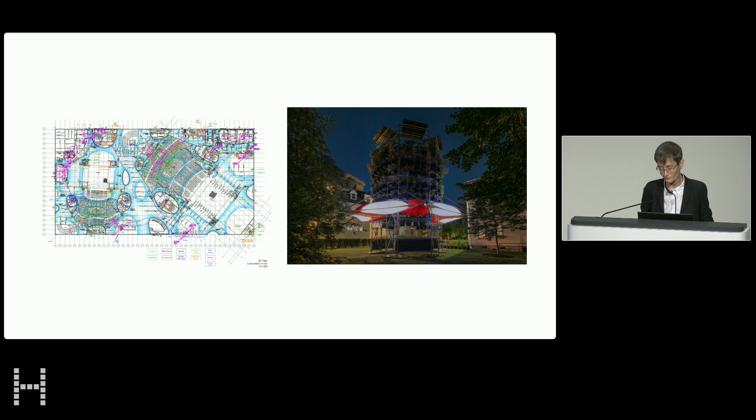John Andrews' building, Gund Hall, our school's heart, was designed to embody the school's collaborative ethos, unifying 3 departments into one single school under one symbolic roof. Our school's students, faculty, and staff come from every corner of the world and with all sorts of varying experiences and expertise. It's our vast multiplicity of perspectives that fuels our classes, our conversations, our research, and our projects.

In my email to you all, I turned to Anthony Appiah's book, Cosmopolitanism, which I was surprised to realize is almost 2 decades old at this point, but it seems ever timelier every time I read it, given the complexity of our current world. In it, Appiah urges his readers to learn about people in other places, take an interest in their civilizations, their arguments, their errors, their achievements, not because this will bring us to agreement, but because it will help us get used to one another. And I think that's a really great way of understanding how we all operate in this big, messy school. A spirit of cosmopolitanism, in short, is fueled by a genuine and generous interest in and conversation with others.

So today's event is a chance to learn about the work of others, our 8 new ladder faculty, as a means of catalyzing conversation with them and with others, afterwards at the reception that follows and for the rest of the year. I've asked Rachel, Magda, Maurice, Iman, Elisa, Angela, Kaja, and Karen Lee to very briefly present how they see their work as being relevant to the school and/or to the moment. Now, I want to be clear, they are not presenting full-on lectures. They each have a mere 12 minutes to present essentially one point that is intended to seed conversation with you all.

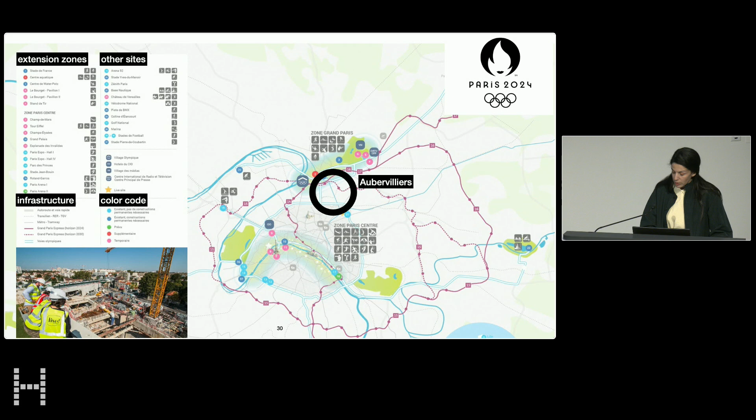This transit expansion was planned in concert with the sites for the 2024 Olympics, which are set in the northeastern part of the metro region. In 2023, actually, the GSD awarded the green prize to the Grand Paris Express. Together, the two initiatives, Olympics and GPE, have turned suburbs like Aubervilliers into sites of unprecedented real estate development and speculation.

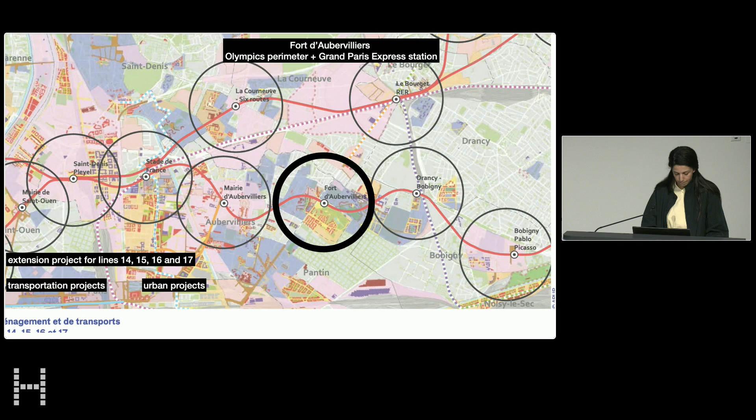40% of Aubervilliers' residents are foreign-born, and fully half live under the poverty line, making it the second poorest city in the capital region. Historically, it's always been a polluted suburb, the dumping ground where Paris dumped its industrial waste, and with the rise of cars, it became known as the city's go-to open-air garage.

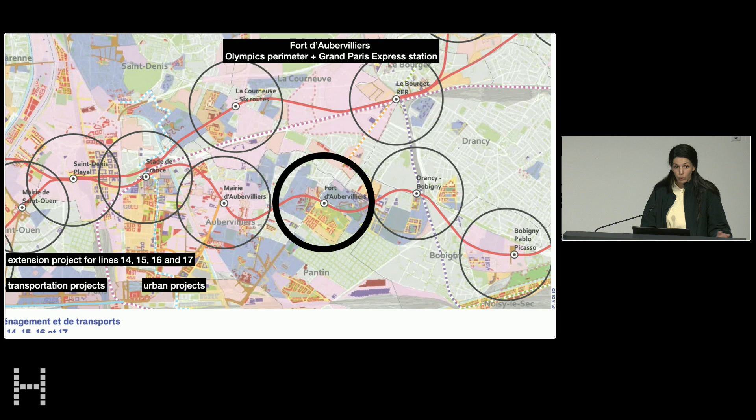But because it is just over the highway from Paris, it's also beginning to gentrify and attract interest from market rate developers.

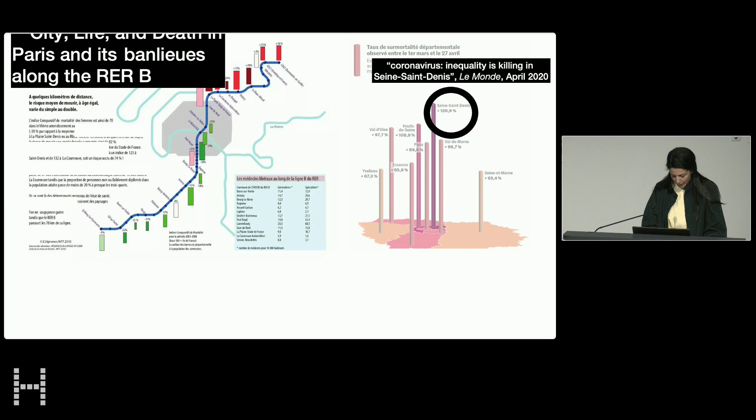In 2014, in line with the extension of the Grand Paris Express, developers proposed plans to transform the city's obsolete military site into a gigantic eco-district. It was proposed as a 36-acre project that would equip the neighborhood with 1,800 new units, 25% set aside for lowest income households, and a new state-of-the-art Olympics aquatic center.

You might ask, how did this affordable, healthy housing project come to be on a parcel so valuable for market rate development in a gentrifying inner ring suburb like Aubervilliers?

That might be a David and Goliath planning story. Aubervilliers is what we refer to as a red suburb, a historically communist stronghold. So it's not a surprise that the local communist housing coalition, defeated now but in place at the time, led by then Mayor Mériem Derkaoui, a real maire bâtisseur or builder mayor, followed 3 steps to negotiate this deal. She first filed a complaint, as one does, then she froze building permits, then she topped it all with a formalized public-private partnership. Beyond the Olympics myth, progressive new public management with a French twist.

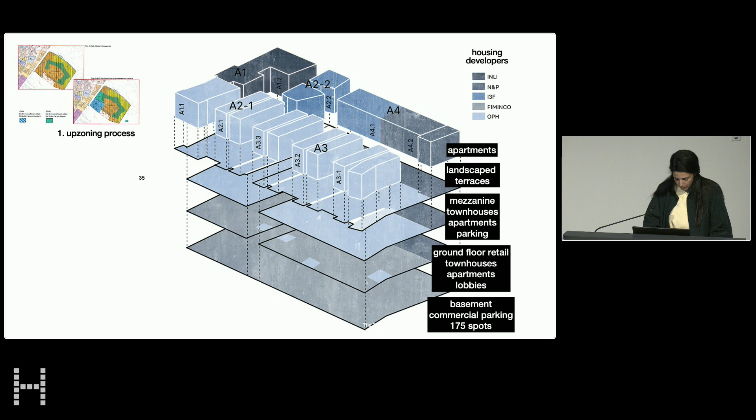This gave way to a fast-tracked upzoning procedure for the entire Fort parcel, which allowed developers to build at maximum capacity. Second, the coalition had a say in every aspect of the eco-district healthy housing design, including that the site's beloved 90-year-old community garden, which had occupied 5% of the land, be preserved, if in some cases relocated.

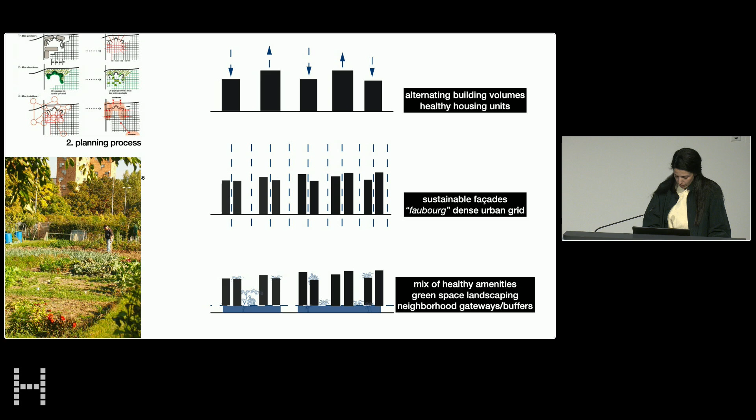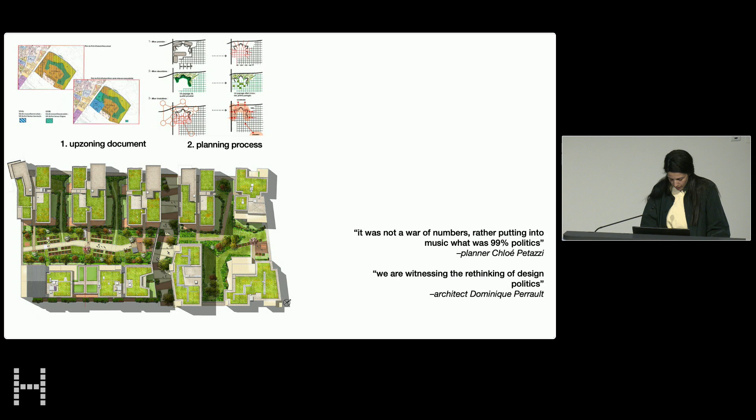The direct impact this coalition had on a series of zoning codes, charts, and plans associated with the Olympics perimeter illustrates the micropolitics of planning and a one-of-a-kind rethinking of design politics.

Looking at this case shows that it's possible to have both hard-won, significant community benefits, such as pool access, community gardens, state-of-the-art sustainable architecture, and a very, very proactive and aggressive pro-housing approach.

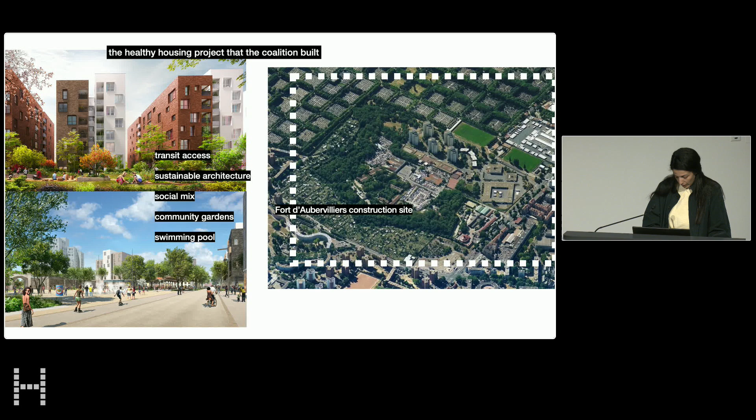This story is not particular to the suburb of Aubervilliers. It shows that in Paris and elsewhere too, there's no irreconcilable conflict between community involvement, developer concessions, upzoning, growth, and healthy planning goals. It's what characterizes the Paris housing model, more so than the frail 15-minute city concept, a mythology I certainly don't believe in, but we won't get into that today.

This lesson was top of mind when I worked at the Paris planning agency, APUR, where I was in charge of identifying and disseminating healthy planning initiatives.

Compared to the other built-up older American cities like New York or Boston, Paris was building more housing faster. But healthy approaches were always thought of and still thought of as on the margins of the planning field, and not at the center.

And that's something that Mayor Hidalgo, Anne Hidalgo, that you see here on the slide, was ready to change. She made our work around health central to her political agenda and her planning agenda. And to make us attuned to the important work that still needed to be done, particularly in the field of environmental health, she moved our agency from a building that looked like this to an old warehouse overlooking the highway and the city's waste collection center. All it took to move us away from myths into relevance.

Some projects we worked on were very small in size, from the school street to the hospital courtyard, or the scale of one housing unit. Others were large-scale health impact assessments, community programs, and health disparity studies.

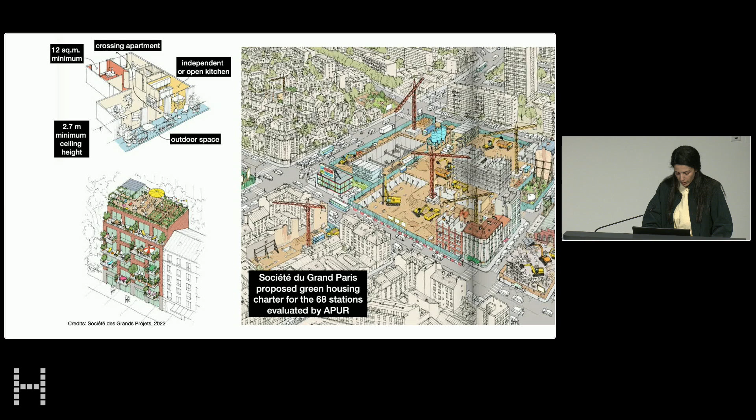My team evaluated, for instance, the Grand Paris Express developers' proposed green housing charter, which orients new housing across all 68 stations of the new Metro line, for large perimeters, infill housing, or smaller parcels. Such design elements as ceiling height, cross-ventilation, and so on for 8,000 future units, evaluated through the lens of thermal comfort to mitigate urban heat islands.

While my work was never simply celebrating the impacts of large development projects, I also wanted to question the pure criticism around the Olympics, or the Grand Paris Express for that matter. For instance, I co-authored a Lincoln Institute grant project showing that housing supply was steadily increasing in the redeveloped perimeters, but that compared to similar hot markets like New York, there was no ground for hyper-gentrification-induced displacement claims or an actual spike in rents and sales prices.

I continued carrying this type of work at the Joint Center for Housing Studies and will also do so through a French-American Albertine Foundation grant.

We adopted dozens of findings about small to mid-sized health initiatives into the new zoning regulations of the city's pioneering PLU bioclimatique, a strategic land use plan that will orient what gets built or rehabbed for the next 20 years, pioneering a way of planning the city with health and climate change at the forefront.

I hope to continue exploring this, for instance, at the GSD's Healthy Places Design Lab, led by Ann Forsyth and Jennifer Molinsky.

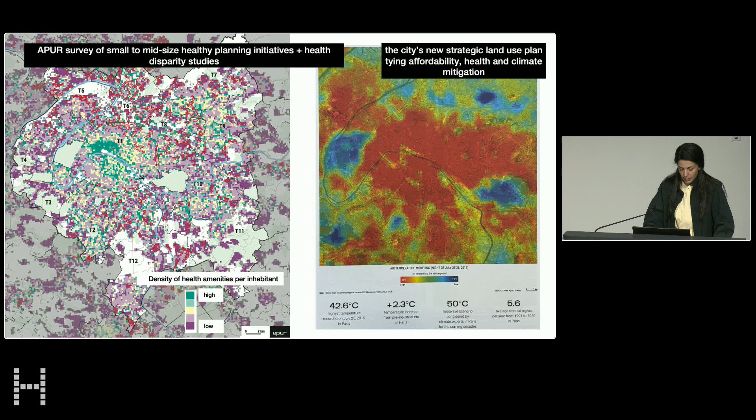In addition to developing data analysis that made it into zoning codes, a priority is to publish research for larger audiences. In 2022, I collaborated on the French issue of Architectural Review, where I critically discussed healthy planning work led by Mayor Hidalgo's administration, as well as other planners and architects working in the city. This piece was among the magazine's most read stories of that year.

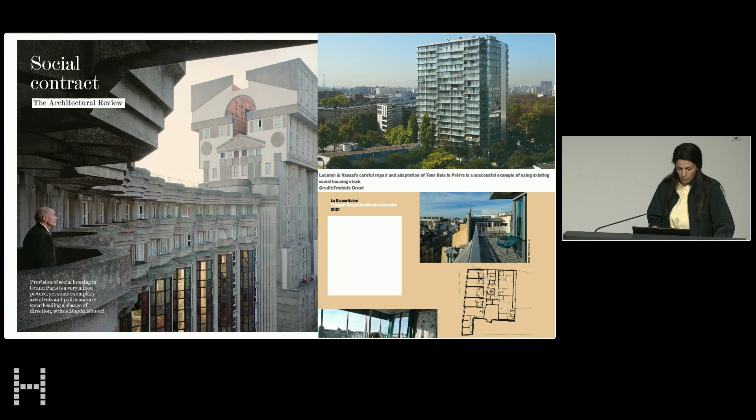I also wrote about this in two upcoming collective books. It's in French, who cares, you might say. One of them, Nos lieux communs, out this Wednesday, will be translated to English in a few months. And my take in the second one, out next month, will be distilled in upcoming peer-reviewed publications in English.

My first experience at Harvard goes back to 2018, when I co-taught a summer school on healthy urbanism with the extraordinaire late Rob Blue, whose mentorship lives on. Last year, I got to work with fantastic students when I co-taught Core Studio with terrific colleagues here, which I coordinate this year as well.

I'll also talk about all this in a fall project-based course, Do No Harm, Dilemmas in Planning for Health, with the Paris-based client Roofscapes. First class is tomorrow at 9 a.m. in Gund 318.

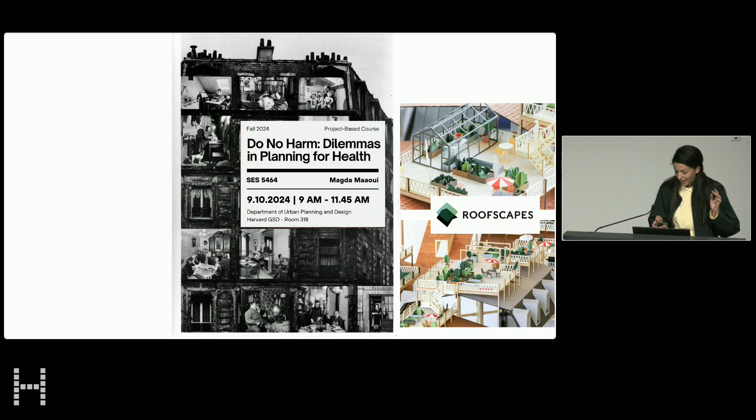And in the spring, I'll teach at home and abroad, housing in comparative perspective, in partnership with the New York-based Urban Design Forum. Thanks for listening, and I'm leaving with music on, which is perfect.

Can we just keep the music on, please?

Hey GSD, it's wonderful to be here, to be back after some 20 years from my Loeb Fellowship and teaching my first option studio on Detroit, where I later went on to live and work.

So a little bit about my journey here and the roots of my design advocacy. I grew up in Brooklyn. My parents, immigrants from the Bahamas, would raise 9 children here. I was the youngest.

During the 20-plus years that we owned our home, I watched a socially and economically vibrant community fall into disrepair and disinvestment. I remember very distinctly when the bulldozers arrived. My house was at the fault line of urban renewal. Fortunately, our little block remained intact, and but for the fact that families owned their homes, my block would have been completely demolished.

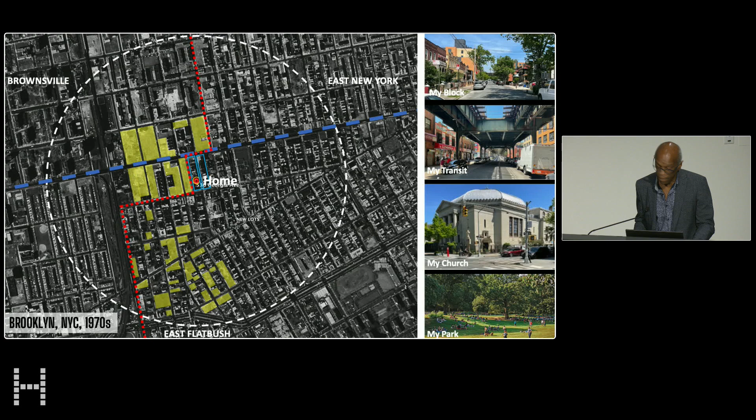I would later come to understand that the decline of my neighborhood was mirrored in hundreds and hundreds of communities just like mine, and this was the result of intentional race-based public policies like urban renewal, federal highway construction, redlining, and many others that segregated communities and starved them of the resources they needed to thrive.

So when I arrived in Detroit in 2015, I found an incredibly resilient community of hundreds of thousands of individuals who simply refused to leave and give up on their city. My job as the planning director was to understand why they stayed, to see them as citizens worthy of being surrounded by beauty. In fact, I have come to believe that it's ultimately about people and that everyone has a right to live in a socially, environmentally, and economically beautifully designed community.

I discovered that the soul of a city, any city, resides in its neighborhoods. You can't transform a city for all if you lose its soul. I've worked to transform the places where people actually live out their daily lives.

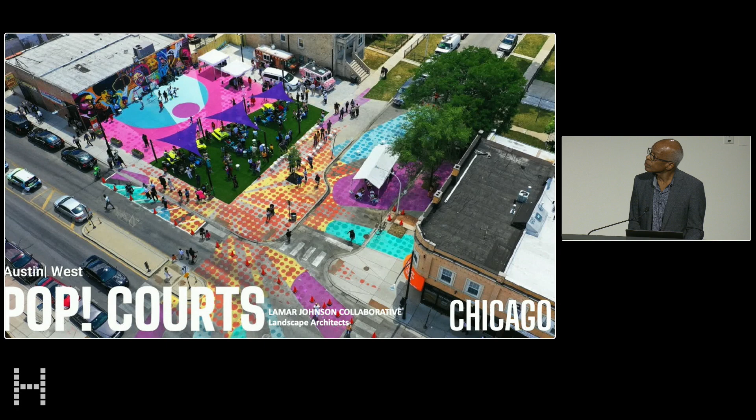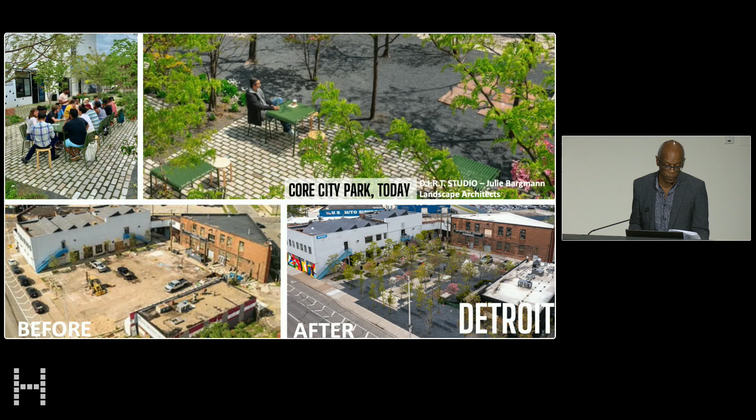It's also about parks nestled in existing neighborhood fabrics that have the power to instantly solidify a sense of place and generate reinvestment along its edges. It's about greenways that repurpose abandoned infrastructure of cities and other forms of mobility that act as the connective tissue between neighborhoods.

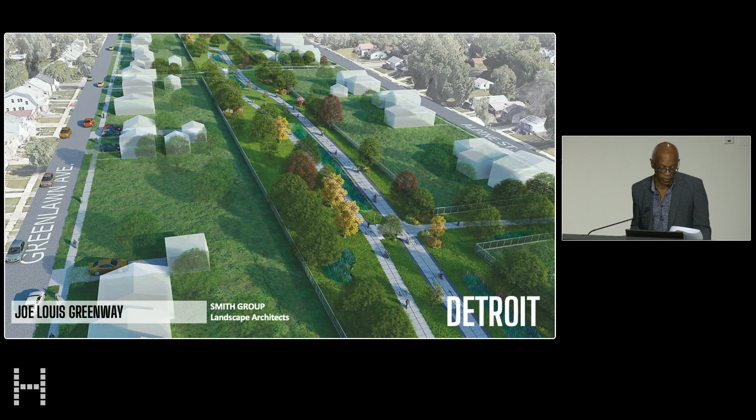This 2-mile pilot gave the city of Detroit the confidence to take on one of the most ambitious greenway systems, 27 miles long, a linear park connecting 25 different neighborhoods and crossing 3 cities, connecting them all to the Detroit River and to each other. This $250 million park system for pedestrians and bicycle mobility is being built in phases, first in neighborhoods that have historically had the lowest rate of car ownership and the lowest level of public investment in amenities of this type.

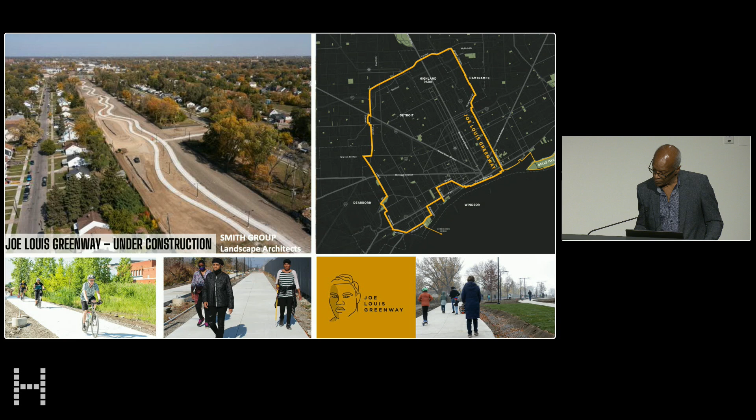It's about telling history through buildings that have witnessed it and survived to remind us of collective memories, finding ways to add new layers of history and contemporary stories to be told through addition. With so many vacant buildings available in Detroit, how to catalog them, mothball them until the right use is found, and even reinventing new planning tools such as tactical preservation that sizes the program and financing available to rehab only the portion of the asset that is available, with the remainder to be mothballed.

Returning a long since shuttered religious complex to a new public center of community, this time for the arts, like the Shepherd, using it to spur residential infill in the surrounding areas. And it's about development that has character and how to inspire a new generation of community developers to place design at the center of their goals for redevelopment.

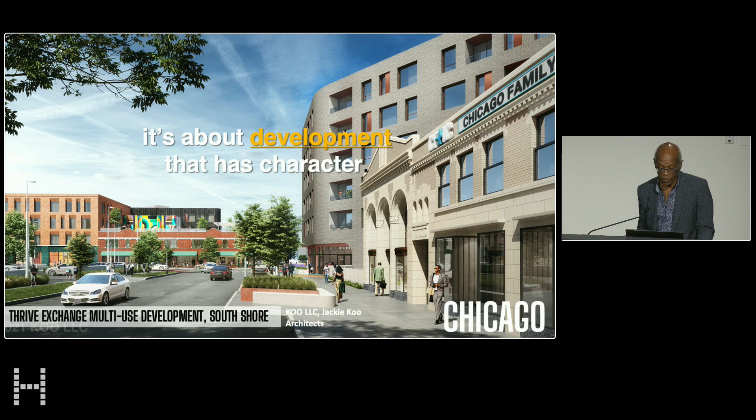This is about filling the gaps left from decades of disinvestment in low-income neighborhoods. It's about increasing the mix of uses and densities and incomes and honoring these iconic neighborhood buildings that are beloved by residents, aspiring to excellence in contemporary architecture, able to stand side by side in a historic context.

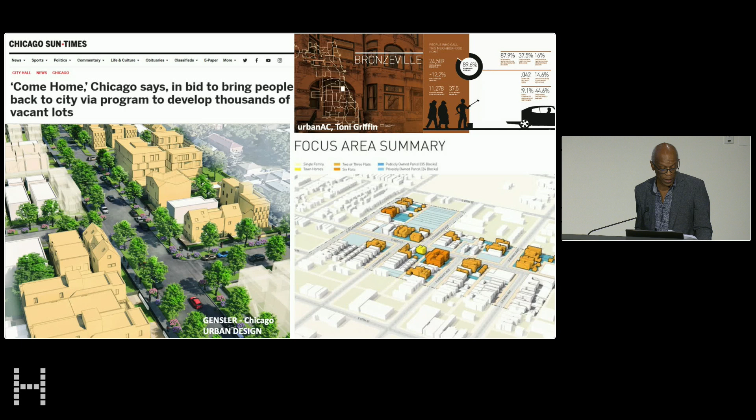Then carefully inserting the missing middle density, explored through home ownership in ways that rebuild and reknit neighborhoods incrementally together over time. Creating new building typologies that allow for greater density within a traditional single-family neighborhood while providing new contemporary ways of living.

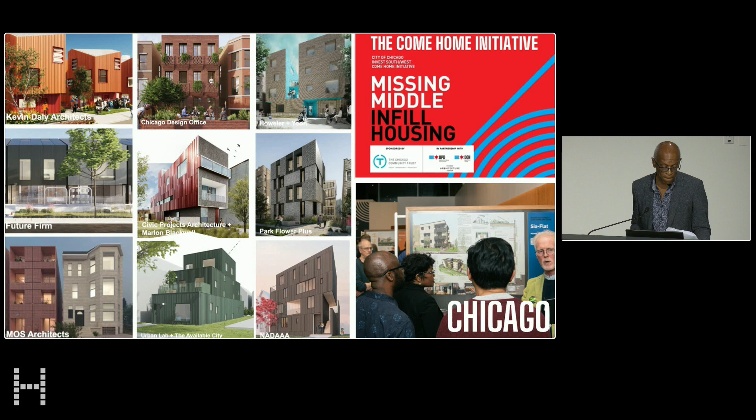This was the goal of Brush Park, City Modern, that brought together 5 different architects, multiple developers to design and build 400 units at multiple scales, at multiple incomes and types to produce a truly mixed income neighborhood that could be built over time.

So I believe that access to quality design, to a quality design environment, is a right. And it is our call to action to use every discipline that we teach, that we learn, that we share, to be used at the service of designing for all. Thank you.

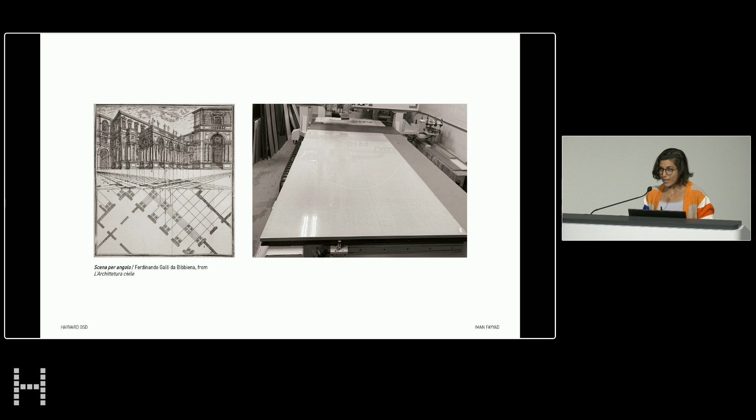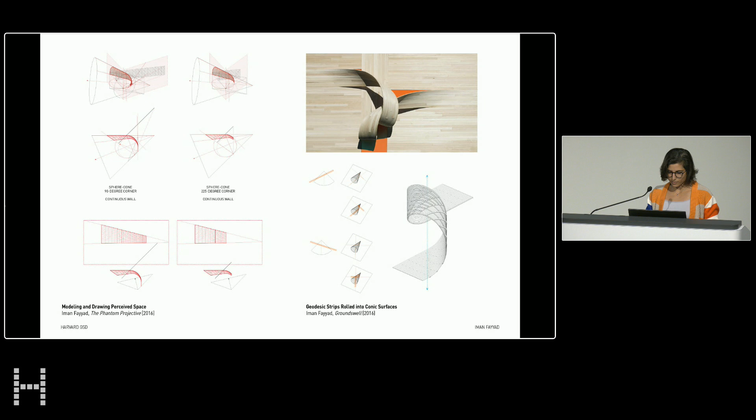Specifically, I look at the relationship between flatness and three-dimensional form. First, flatness represents the drawing board and picture plane, and second, it describes the material realities of construction. I'm interested in challenging convention within both those practices. I interrogate techniques of projective representation that are instrumental in discovering and inventing new geometric vocabularies and spatial relationships—on the one hand, how tools of vision and perspective can inform urban and architectural form, and on the other, engaging methodologies that equate design with constructability through material flatness.

A lot of my work draws from historical techniques that considered this economical relationship between design, material, and the labor of construction, many of which were highly computational but deployed the simplest and most rudimentary tools of production: linear carving tools, a compass, and a ruler. Learning from these early technologies helps us better understand both the virtues and concerns of the digital processes of contemporary practice, which I believe have complicated our relationship with architectural form and building practices.

I often look to other disciplines, like cartography, to understand how projective transformations can help us think more critically about visual perception and other forms of bodily experience. I look at techniques that map the globe onto a plane to draw relationships between central and parallel projections in ways that allow us to rethink traditional modes of inhabiting space, challenging building functions, types, and programs.

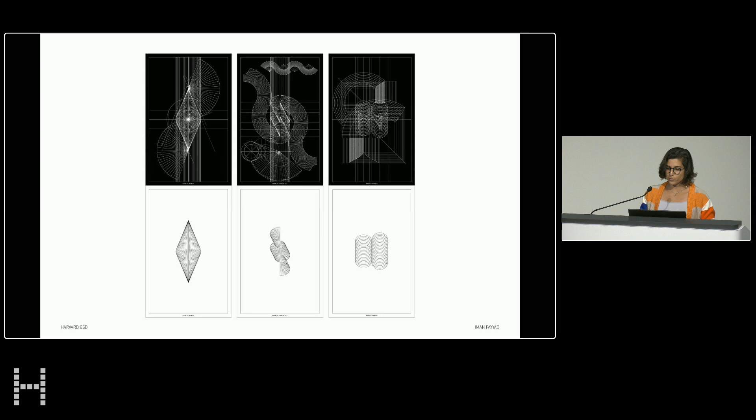I use these techniques to study the misalignments between cognitive perception of an image in the mind and the reality produced by the hand, challenging the limitations of the static image in representing movement, as well as exploring the vast potential of the drawn line to invite a plurality of interpretations. An image suggests infinite possibilities of three-dimensional realities, depending on who is interpreting it and how and why.

My most recent design research and built work considers this organic link between material flatness and drawing as an opportunity to fuse the design process with construction, which allows us to both think in 2D and 3D simultaneously, something first years are dealing with right now and know all too well, and start thinking about material economy and labor early in the design process.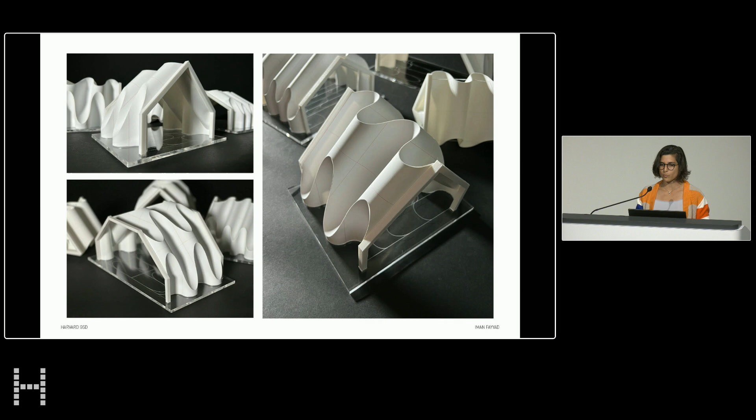Over the past several decades, the ability to so easily produce formal complexity has disregarded the realities of material waste, cost of building, tectonic considerations, and access to design. By engaging the isometric relationship between flatness and three-dimensional form, I've been looking at how waste-conscious approaches to geometric exploration can create new architectural languages.

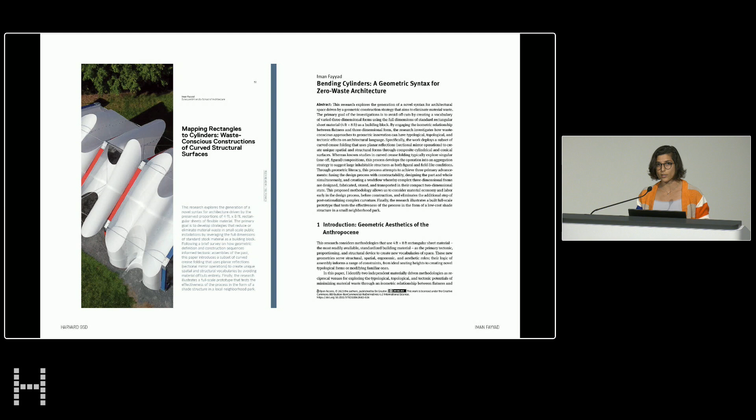This particular line of inquiry attempts to address three primary issues. First, to fuse the design process with constructability. Second, to design the part and whole simultaneously. And third, to create a workflow whereby complex three-dimensional forms are designed, fabricated, stored, and transported in their compact two-dimensional state.

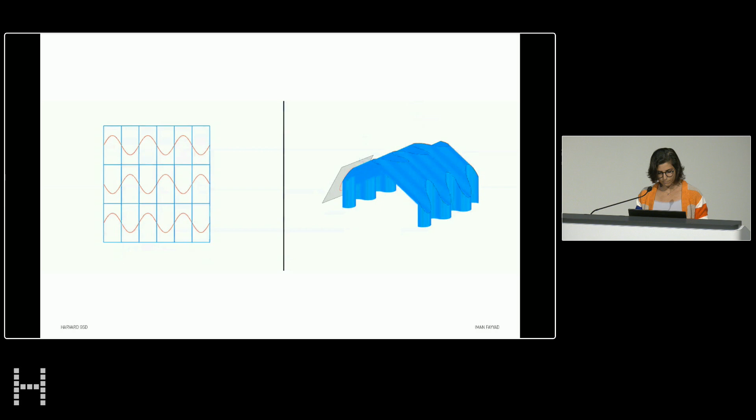Various efforts in the past have leveraged standard dimensions of readily available stock material, particularly 4 by 8 foot sheets, in this case plywood, to define tectonic and aesthetic characteristics of buildings. I like thinking about how tectonic expressions, in other words, the logic of assembly of parts, leaves traces of the labor of construction, sequences of assembly, and origins of materials themselves. Like the work of Eleanor Raymond, I'm interested in developing ways to deploy the rectangular sheet not to rationalize complex geometry, which is the more common practice today, but rather to generate it.

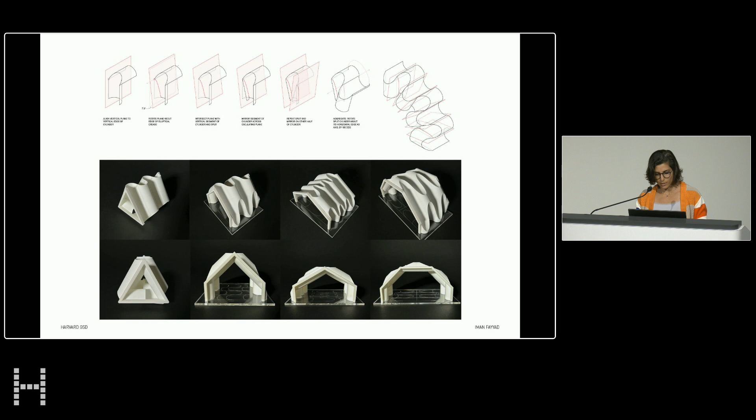This research is part of a larger inquiry into formal techniques which interrogate why and how certain materials, building types, and construction methods are often confined within exclusive social and political domains. The work tries to advance the discourse around computational architectural geometry by exploring how it can serve as interlocutor between the often disparate issues of environmental resilience, materiality, structure, and formal exploration.

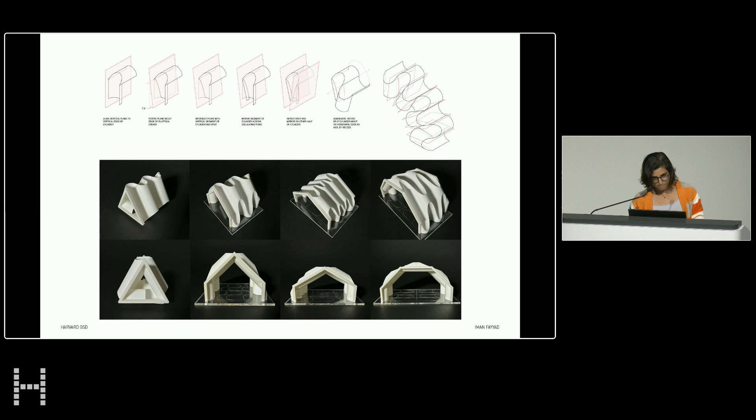A few years ago, I collaborated with the City of Cambridge's Community Development Department to identify urban heat islands as part of the city's 10-year Resilient Cambridge program. In addition to planting more trees and investing in green space, they were interested in installing temporary shade structures in lower-income neighborhoods as a form of public art to invite curiosity and activity.

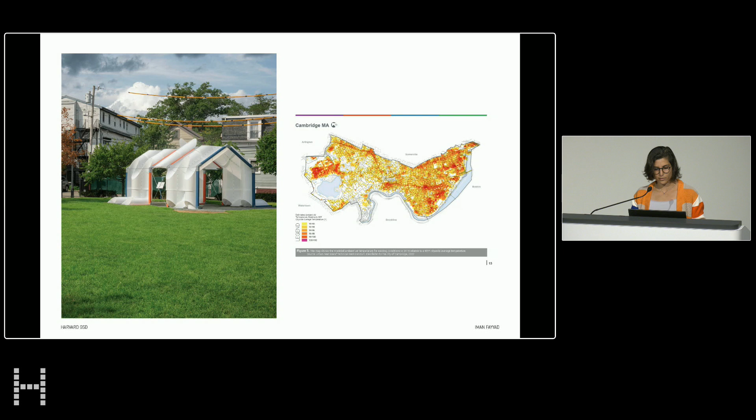Because of the nature of the project, it was important that these structures are cheap, quick, and easy to design and install. Placing material waste and cost as a primary constraint became the central focus of the project.

The project sourced local, off-the-shelf rectangular sheets of HDPE, a recyclable, UV-resistant material that's affordable and easy to use as a building block for a shade and seating structure.

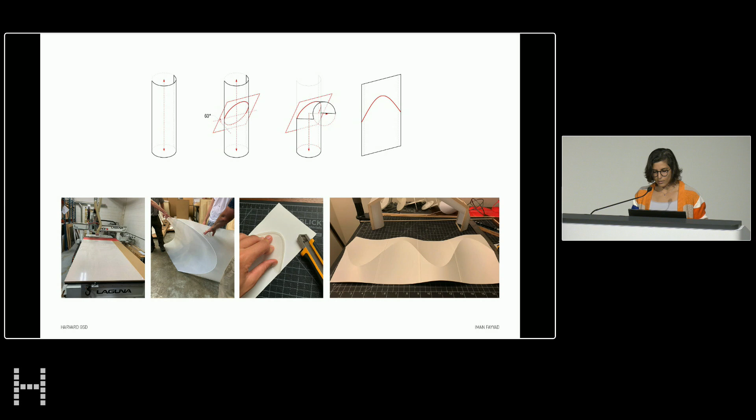The technique shown here, a subset of curved crease folding, which is similar to origami, maps rectangular sheets onto cylindrical and conical structural surfaces. The entirety of each sheet is used. No part is cut and thrown out. Instead, they're merely scored and bent into shape on site, requiring few and simple fabrication processes.

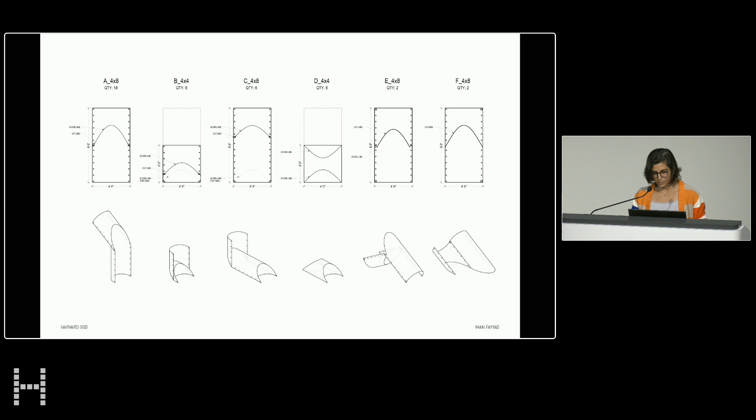So this allows us to both design and construct in 2D entirely, stitching sheets together in the flat state and inflating them into their three-dimensional structural forms on site.

Shout out to my amazing research team at the time, Audrey, Jack, Rashad, and Pietro, and later Becca Shalip, for their contributions to this. And although they're outstanding designers, thinkers, and makers, neither they nor I are experienced fabricators. I mention this because a big part of this work attempts to embed the complexity of the process of construction into the geometric DNA of the material, making the structures possible to install with minimal skill and cost.

It's fruitful and uplifting for both my students and myself to witness firsthand the immediate impact of research that may seemingly be couched within the academy as a highly disciplinary endeavor, which it is, as something that can also be explained to members of the public, particularly those whom this work affects and serves.

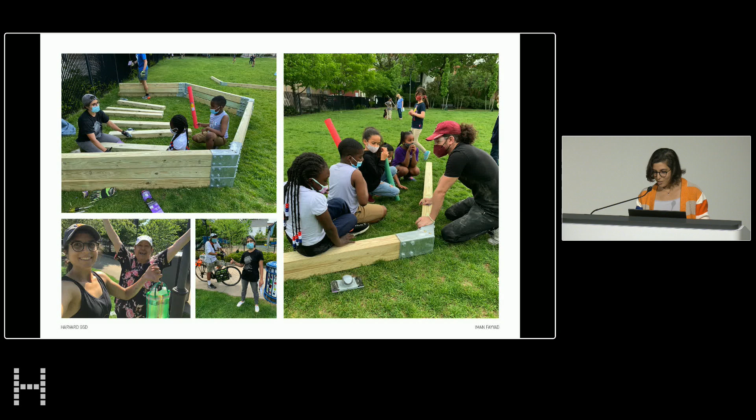Daycare children and students from the nearby elementary school would come out and curiously ask about the project during their recess hours. Public housing residents from across the street would generously bring us cold water while we were working in the heat, and share stories about how the space has evolved over the years. And this one guy who teaches tennis lessons at the court adjacent to the park, whose mother the park happens to be named after, would come by and talk about how important it is to be involved in shaping the public spaces of our communities.

It also became a new location for GSD student yoga sessions.

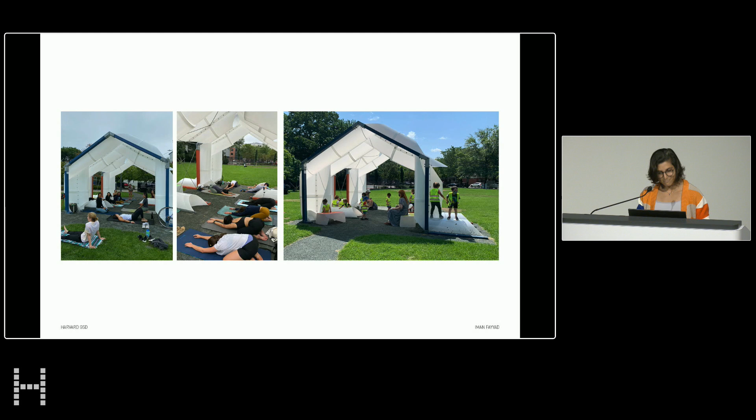Because of the temporary nature of this type of work, the lifespan of the material was considered so that once the structure is dismantled, the sheets can be reconfigured as loose park furniture. We demonstrated this at an Earth Day event organized by a local volunteer group to have school children in the area learn about climate change and sustainability, making their own little shade structures out of household materials.

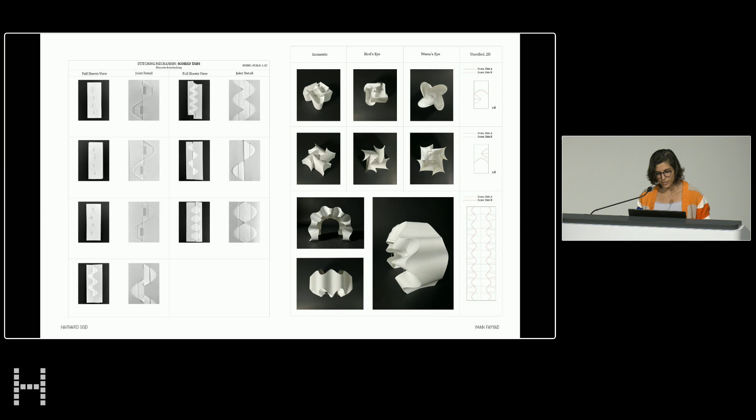I'm now developing these techniques to explore other types of spatial scenarios, fine-tuning assembly mechanisms to further streamline the process of installation, and incorporating structure into the surface geometry itself.

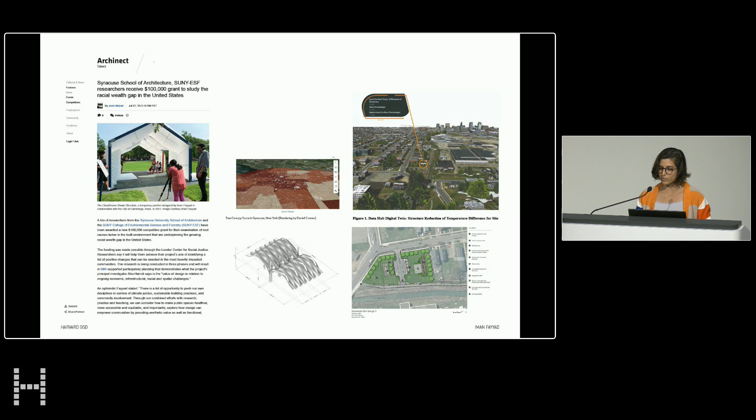Over the past two years at Syracuse, I've been working with the landscape architect to learn about how we can be more deliberate with community-engaged processes, focusing on the co-production of knowledge between researchers, students, and community members.

I'll end by mentioning that in the spirit of relevance, not everything we do may seem to be immediately relevant or impactful. I think about this often with my work, which spans theory and practice. A mentor once told me that if something seems to be at least remotely exciting to me, it is worth pursuing, even if you can't answer the 'so what' question immediately.

You don't know when or where or how it can become relevant and applicable, but relevance has various audiences, and sometimes it's okay, great even, to pursue things just for the intellectual engagement and satisfaction it brings you. Eventually, it will contribute to your outlook in both implicit and explicit ways.

But we also have more agency to affect change than we might think. We can and should work with policymakers, clients, community organizers, and not wait for them.

The shade structure project that I just showed came about during the pandemic when I would go out for long walks, as many of us did, and noticed that many of our parks were underutilized or even fenced off. I wrote to the city of Cambridge myself and asked if there were opportunities to do something that would encourage outdoor gathering during COVID in the summer heat and activate our open spaces.

This process taught me that though many don't look directly to architects to address society's challenges, our responsibility is not only to design, but to educate about the power of design as something that perhaps won't totally change the world, but at least make it a little bit better, more beautiful, and more meaningful.

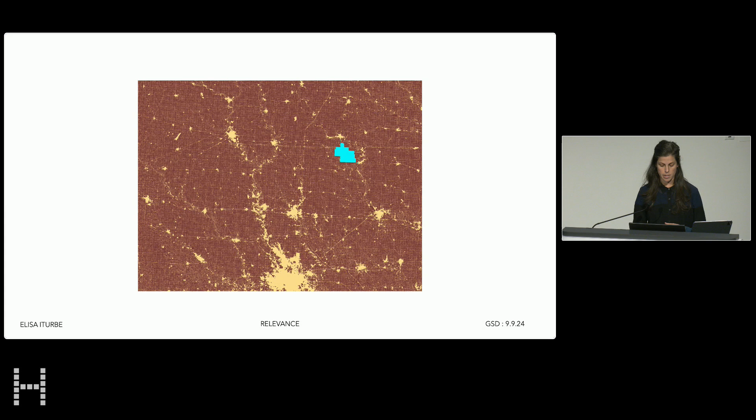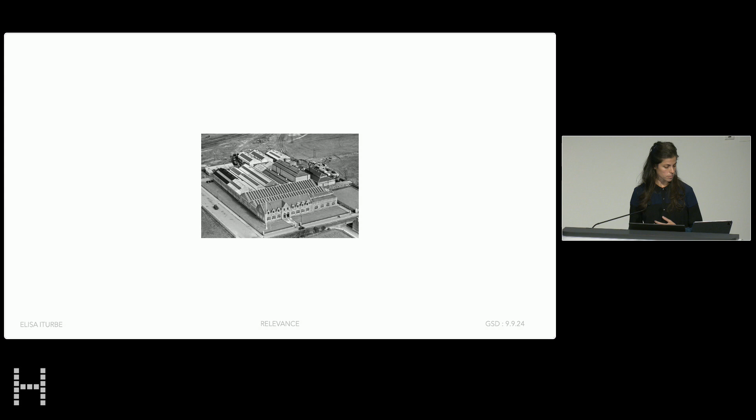You might immediately think of suburbs, shopping malls, parking lots, transit hubs, and infrastructural connectors. Those are easy ones because they relate to the emergence of cars. But there's also a typological evolution at the scale of the building that's important, because harnessing fossil fuels isn't just about movement, it's also about labor and the reorganization of productive forces. So factories, worker housing, warehouses, distribution centers, office towers, apartment buildings, skyscrapers—these are all part of the story, and they're the spatial building blocks of the modern world.

I like to call them carbon form. I define that as the spatial and formal configurations unique to the carbon era. Of course, they're energy intensive and often dependent on hydrocarbons to function. But for me, it's perhaps equally or even more important that they hold an energy intensive society in place, dictating movement and juxtapositions in the built environment. It's a unique spatial order, which I'd argue is one of the underlying causes of the climate crisis.

But before I continue, I want to clarify one thing, because it would be easy for my thesis to be interpreted as a claim that form follows energy—that architecture and urban form are predetermined by our energy paradigm. That we adopt fossil fuels and suddenly, boom, we get skyscrapers. This is too simple a narrative. Although increased access to energy often correlates to greater architectural ambitions, I don't believe the architecture of the carbon era is simply an epiphenomenon or just resultant. There's nothing inevitable, at least in its specifics, about carbon form.

One reason I think it's worth studying is that the history of carbon form is a story about design, a story about architecture. And by architecture, I don't just mean buildings, I also mean architectural thought. What I'm trying to do is study the evolution of architectural thought relative to humanity's dominant energy paradigms. This isn't the most obvious link between architecture and energy, but I believe it has to be made to fully understand architecture's relationship to the climate crisis.

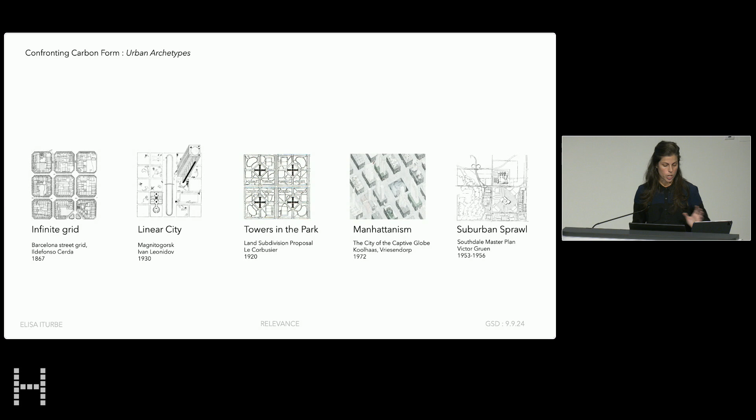So the point of departure for this piece was the selection of a specific project, or precedent, that was critical to the origin of each archetype. They're listed here, including the drawing that we worked from. But there are two important elements to the piece as it was installed.

First is a mirrored box, inside of which we modeled one of the drawings I just mentioned. The mirrors are used to reveal a disposition towards replication, which I would say is one of the characteristics of carbon form at the urban scale.

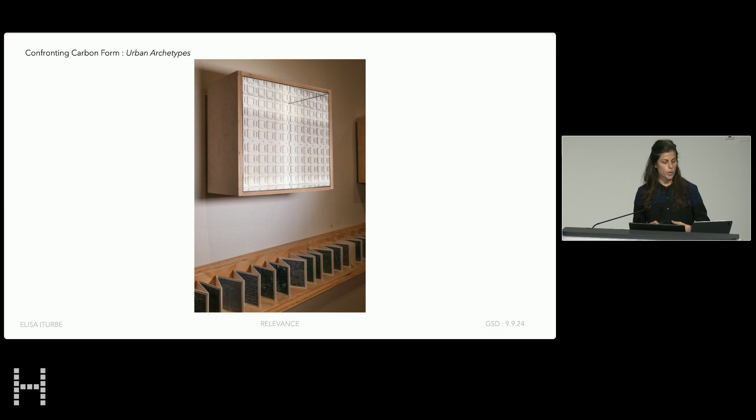But also each model was accompanied by a series of satellite images that are displayed in the accordion of images that you see below the model, and these are showing instances of that archetype in the physical world.

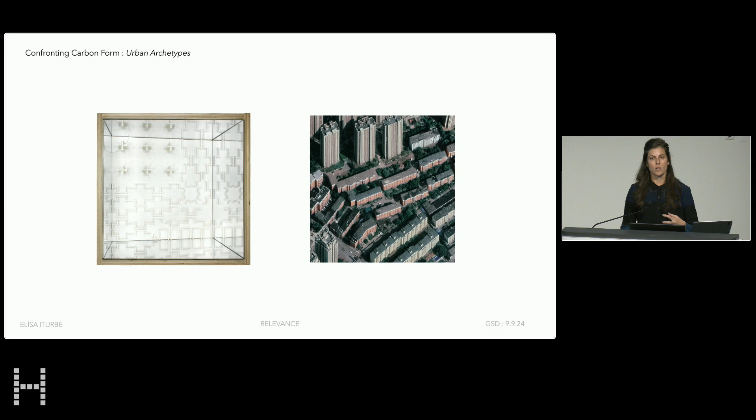So this pairing with a hypothetical project archetype imagined by a specific author and the proliferation of its instances not only emphasizes carbon form's capacity for replication, but in my mind it also shows the importance of architectural ideas. Each of these authors generated, in a particular moment in time, a new idea for a spatial organization. Whether that specific design was built or not doesn't necessarily affect its impact, because in the end each became an archetype and a model and was replicated all over the world in some way.

There's also a sense of excess and absurdity that I was interested in making these models, because one of the things we see across all of them, whether it's a cityscape or a suburb, whether dense or sparse, is a disposition towards multiplication and growth.

So as you can see, the models and the images are critical instruments for making carbon form legible. That, in my view, speaks to the way architecture as a discipline has unique tools at its disposal that can help us understand the problem at hand. In terms of my own work, I see this as a kind of hybrid way of working—there's an active reciprocity between theory and design.

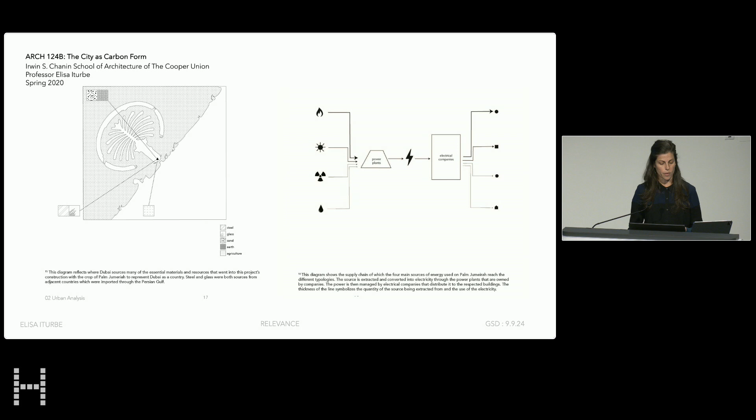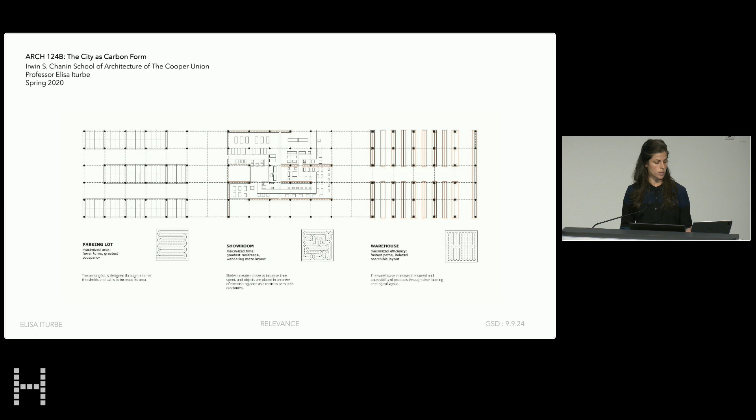And lastly, I'll conclude by talking a little bit about my teaching, which is the third avenue that I explore. This is student work, just flipping through here. For me, the classroom has been a wonderful place of experimentation over the past six years, and I hope to continue that here.

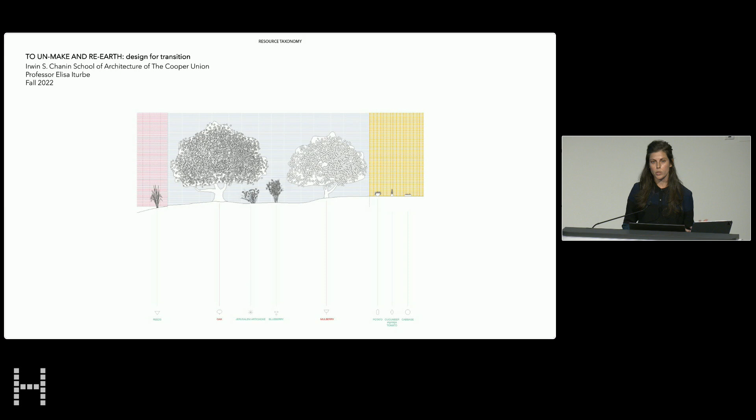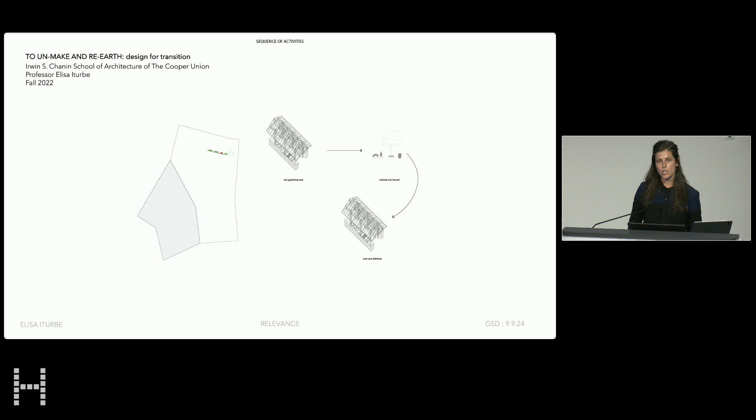In my courses, I ask my students to study the built environment around them or study architectural history, select a precedent that they think is carbon form, and then argue why they believe it is carbon form. The tools by which they do it are important, how they draw it is important, but also how they study space and form through it.

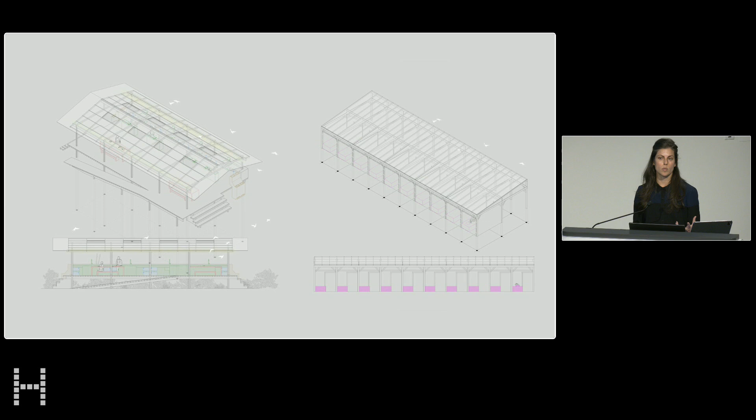I think this reflects the fact that I see architecture as a mode of knowledge, a way of reading the world. If it's a project-based seminar, I also ask students to consider what a counter-project might be—how do you counter the logic of carbon form in some way? I'm hoping to continue that work here with you.

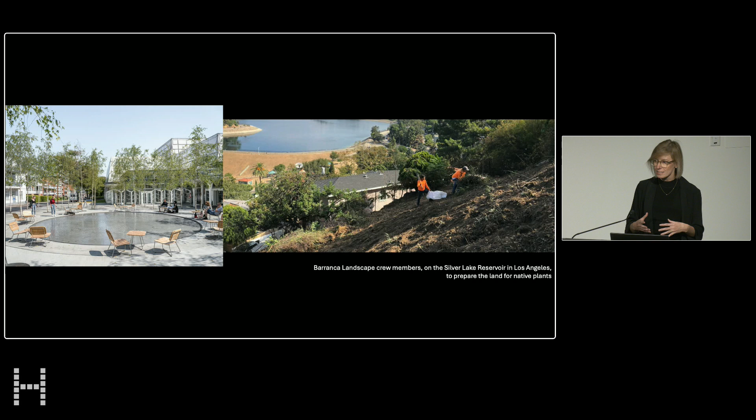That's because scholars have largely only focused on the design history and material culture of the elites, not the people who made the spaces. Although there's been some work on ancient practitioners like architects, sculptors, and painters, one group has been largely overlooked: enslaved, freed, and free-born landscape architects, gardeners, and garden laborers. They are the focus of my work.

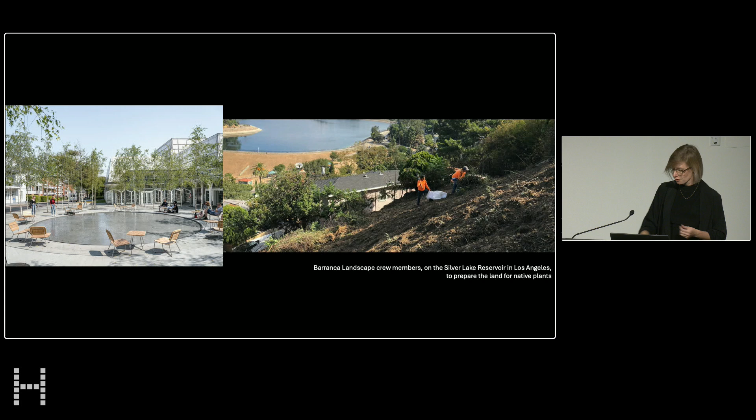Unlike other historians who utilize anthropogenic time—time based on political systems, for example the empire or the republic—I look at the evidence through ecological or environmental time, specifically through the lens of the Roman Climate Optimum, a period that spanned roughly 200 BCE to 150 CE.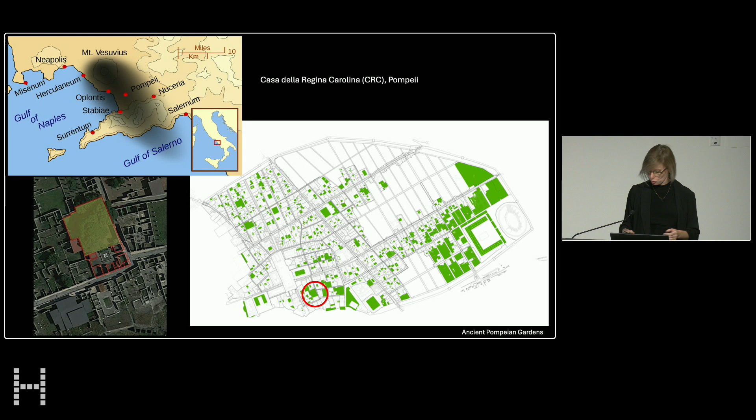Our garden, right here, is a result of this resilient post-earthquake design. The site was originally excavated in the early 1800s by the Borbone royal family, who were really only interested in the wall paintings and the statuary. The garden was left unexcavated.

Since 2018, my team and I have discovered fragments of the 79 CE garden, including the compacted walkway here, and multiple aligned planting pits and flower pots that we see in green on the central plan.

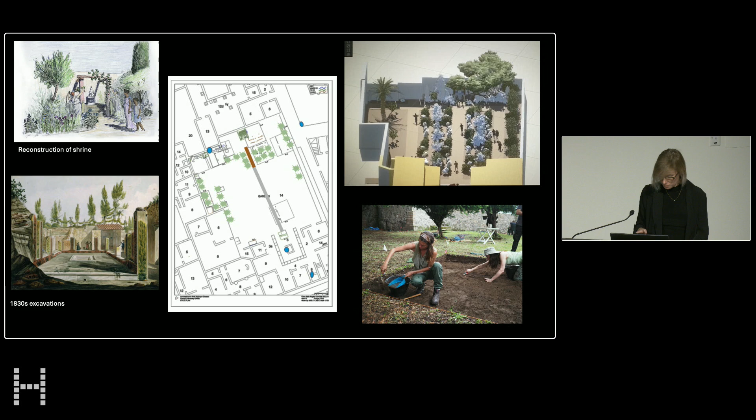Our research has focused mainly on two major areas: one, studying the evidence of invisible Romans, i.e. non-elite use of the space, and two, developing new methods of studying the ancient environment. We'll take a look at two of these new methods today.

The 1993 blockbuster movie Jurassic Park, not where you thought this was probably going, centered around the premise that dinosaur DNA was trapped in and preserved in a mosquito in prehistoric amber. Using a fairly similar concept, we've discovered that ancient wall painting acts as amber for ancient pollen. This is because in antiquity, as today, fresco painting is largely done in springtime when conditions are ideal so that the paintings dry evenly and smoothly. As a result, wet paint captures springtime pollination.

I get very excited about this. As a result, we've discovered a method for capturing an ecological snapshot, not only of the insect pollinated plants directly in our garden, but also a snapshot of the wind pollinated ones from the surrounding region.

We've also discovered 2,000-year-old ethereal, ghostly footsteps in the soil. Micromorphology, the microscopic analysis of soils, has long been used in archaeology for ancient floors, i.e. interior domestic spaces. But we're the first team to test this method on ancient garden soil surfaces. We've taken small cubes of soil and excavated them under a microscope, slice by slice, as we see in this example.

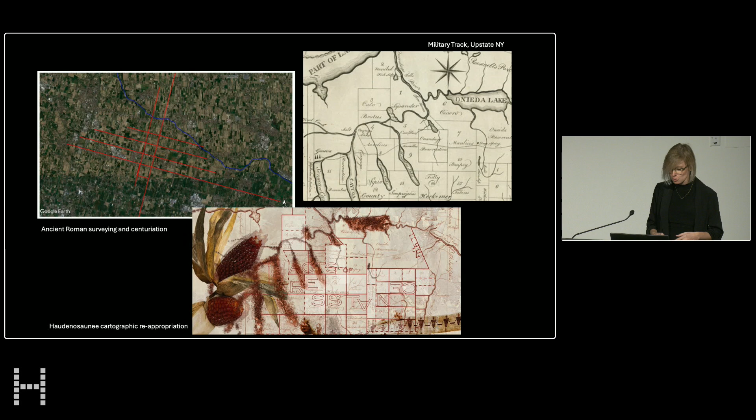And the potential for reappropriation or resistance, as seen in this Haudenosaunee collage here that overlays an Onondaga wampum belt and strawberry popcorn over colonialist boundaries. Depictions such as this collage upend traditional notions of power and cartographic agency and serve as a critical learning tool.

The work I've exhibited today, my own research with my team at Pompeii and in the classroom, is the result of profoundly interdisciplinary work and collaborations drawing on nearly all colleges within the university. I've relied on the strengths of performance and visual artists, entomologists, architects and landscape architects, soil scientists, volcanologists, faunal experts, ceramic artists, and even video game designers, to name just a few.

I look forward to cross-pollinating conversations with GSD scholars, practitioners, and students that will undoubtedly enrich these projects immeasurably. Thank you.

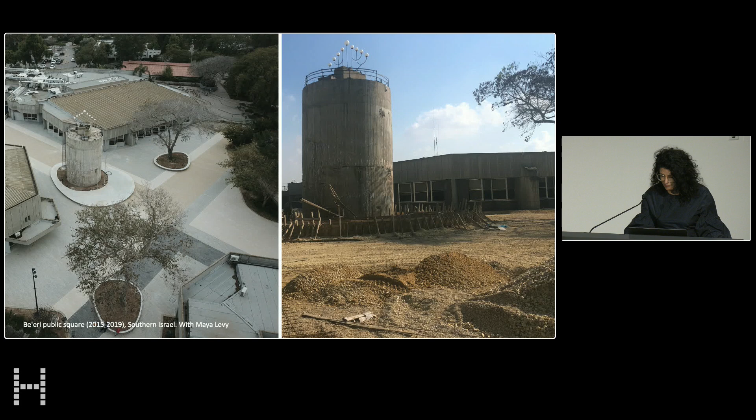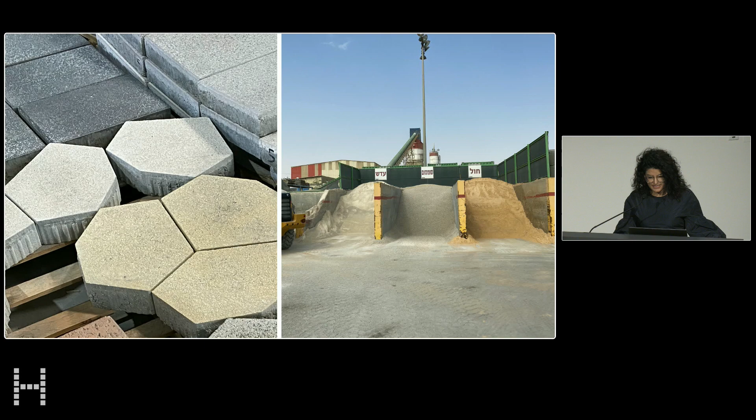Now let's take a look at these bricks for a second. Before becoming part of a pavement, these bricks were, on the right, loose piles of aggregates. Before getting there, they were mined and transported to the site. And so today, sand and aggregates have become the most mined solid materials worldwide. In fact, our consumption has tripled in the last two decades.

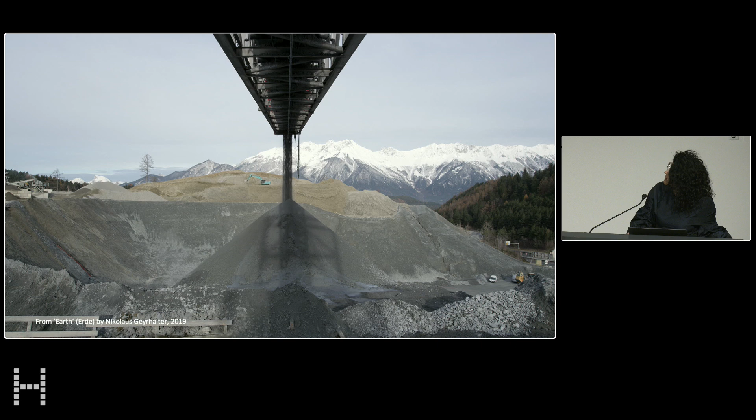So it's crucial, therefore, that we rethink our approach to materials, not only because of their environmental impact, but also because of their growing scarcity. And the depletion of primary materials like sand is leading to conflicts, it's leading to sand wars, it's leading even to the emergence of sand mafias. I believe it's our responsibility to develop alternatives that are not just conceptual, but are really rooted in solid scientific knowledge. And these are some of the things I will be doing here at the GSD.

So looking at materials and tools, I'd like to share a little bit of the material research that I've been exploring with my students and my colleagues, and some that I will pursue. One approach we tested is reconstituting found matter that is still abundant, like desert sand, which still covers a large portion of the earth. Though it does not currently meet the standards of construction, research on how it might be utilized is emerging.

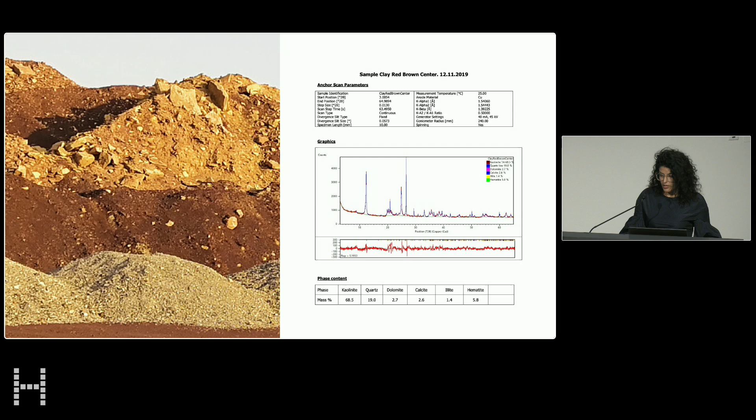We investigated this approach with our student in a desert site in Israel. We collected and analyzed various sand samples, working with an alternative binders lab at the Technion in Israel. We then prepared materials for fabrication, and we tested various assemblies that could be formed through 3D printing the material. This process, which we call reconstitution, essentially repurposes found matter into a construction material.

In a similar way, we developed a method that we call carve to print, where we harvest material from a solid surface, and then we return it to the surface by 3D printing it. This can be thought of maybe as the cut and fill version of solid materials like stone. And it could be used, for example, to form paths on rough terrains in a way that is unique to each terrain.

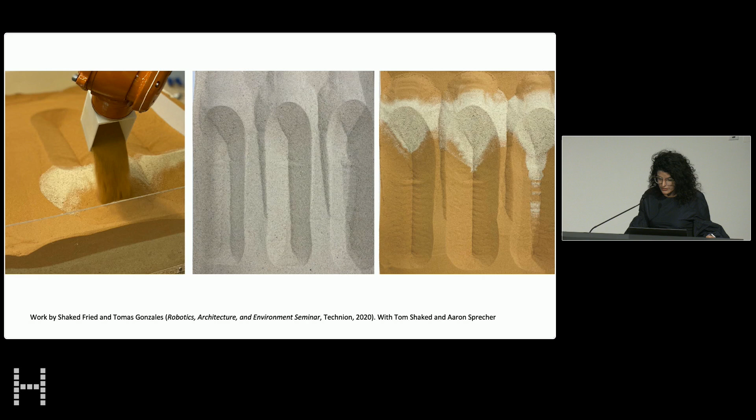One example is we developed a process that allowed us to test the forming of subsoil while separating and preserving the topsoil. The topsoil is where most of the biological soil activity takes place, and the loss of this precious soil during earthworks leads to significant land degradation worldwide. So to combat this, we wanted to develop a color-based method that would allow us to discern how the layers are distributed after we form them. You can see in the center of the image that this is not something we can see with normal soil or sand.

Another example: the students conducted a thermodynamic analysis of Arctic winds and then designed a dynamic snow forming concept to mitigate them. They developed a concept, shown on the left, of a kind of hijacked snowplow that would be used to construct these formations.

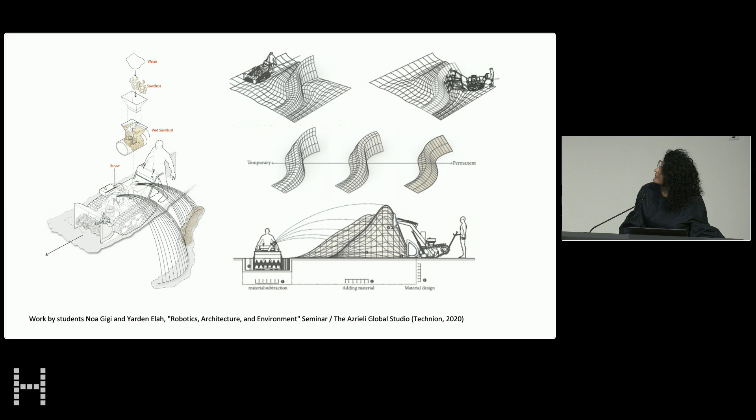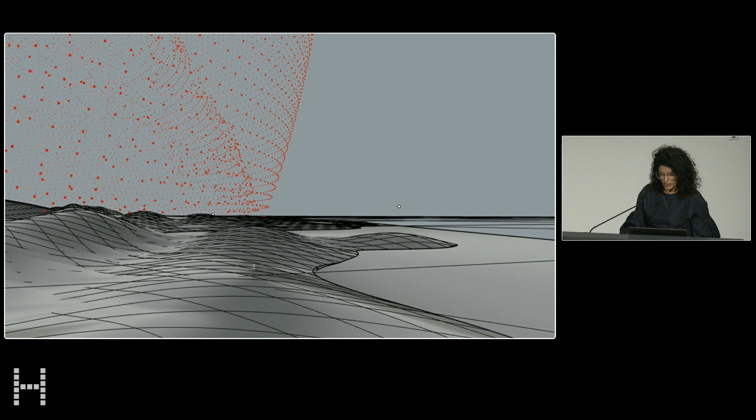A third example of precision landscapes addresses what the World Health Organization declared as the number 2 environmental health risk in Europe: noise pollution. We sought a method to mitigate noise through landscape designs in an area adjacent to the Munich airport as a case study. We developed a method for sampling noise on site and then designed alternative undulating forms, testing them at various heights in a digital twin, a model representing the site and the noise captured before and after our interventions. That allowed us to compare different designs in terms of their noise mitigation effectiveness.

We worked on a local scale, but the simulation of environmental phenomena could soon be conducted on a planetary scale, for example using an upcoming tool developed by NVIDIA last year, Earth-2. Earth-2 is essentially the most powerful AI supercomputer, a digital twin of the Earth. It can allow us to simulate strategies for dealing with climate change and accelerate the development of effective mitigation strategies at territorial scales.

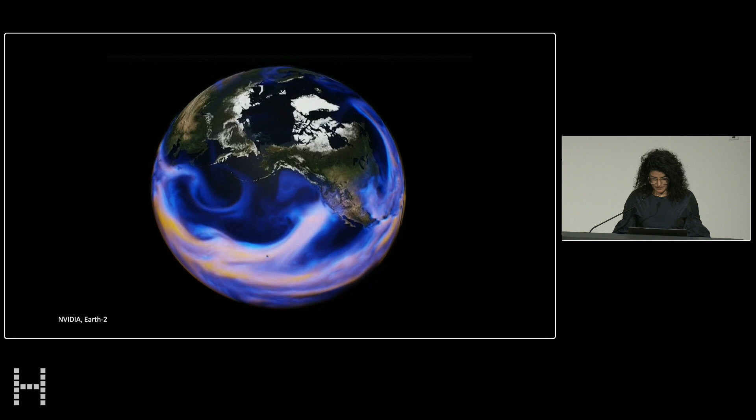To conclude, by linking materials, tools, and the environment, we can transform how we design from small to planetary scales. We can build from found matter, we can compose and combine materials, and eventually we can grow on and even grow our walls. We can do so with growing precision, which will allow us at one point to operate like surgeons on the landscape. Thank you.